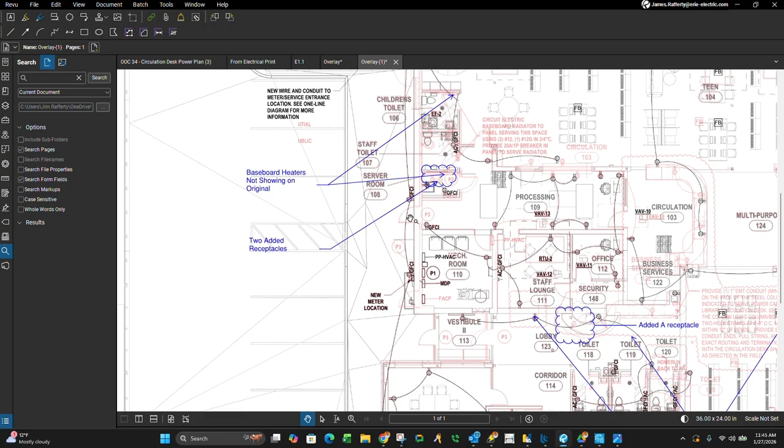After I've done my overlays, you can see right here, I've got everything marked up so that you can see the differences. So what I did right here is I've gone through and highlighted in blue everything that is the difference using the cloud tool, which adds a label too.

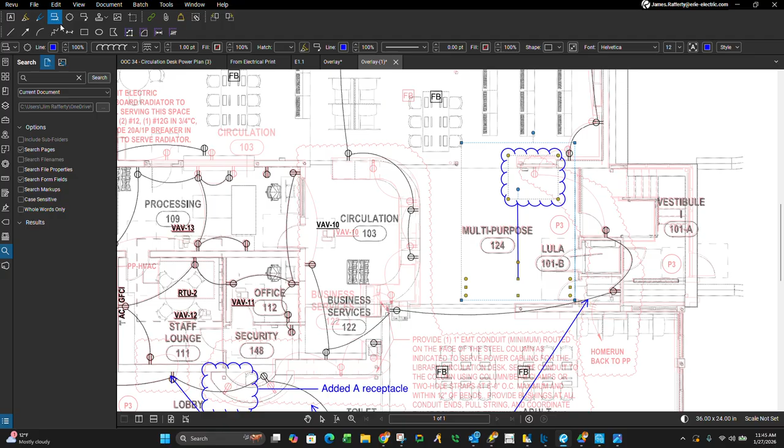What I usually do is change the color since we did red on the background. If you want to stick with this color for everything, you're going to right click on it and go to set as default. So now if I click this cloud again, it's going to stay in that blue color.

So right here we're going to make a note: added receptacle. Oh, we did not change this one, so let's do that again. Now we're going to set that as default.

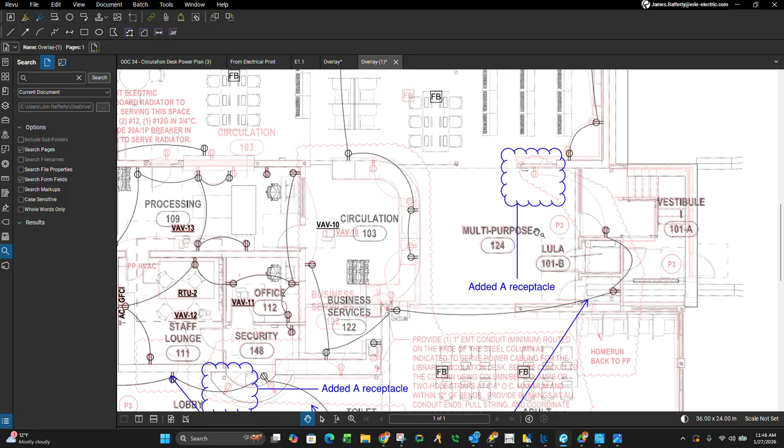So what I'm doing is basically clouding these. You can see right here all this is clouded, but all it was really doing was rerouting this feed that was coming from this side over here to create a new feed. So what I am going to do is carry a whole new circuit coming out here, because before it was just showing it going to there.

So you can see right here when we make one now, it's in blue and the wording is in blue. So they do upsize the conduit right here to 1 inch, so we could get them on that.

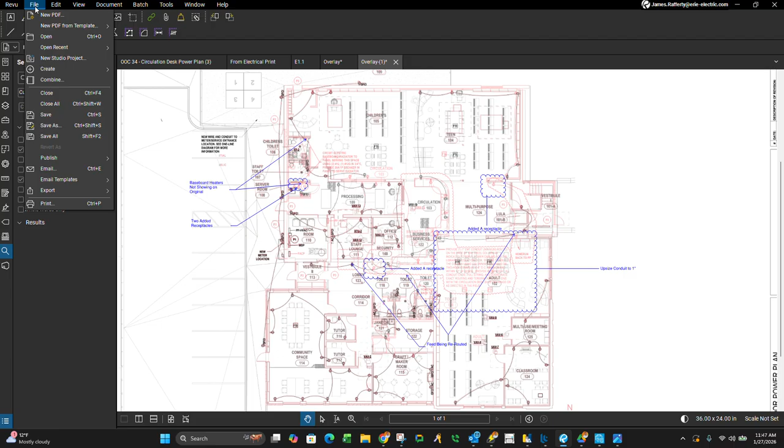Once I've done that, I'm going to save this one for now and get to that later. I'm going to make a full set because it's actually easier to give to the foreman this way too, so they can operate off the most updated prints and check. As opposed to flipping back and forth between everything, they can look through this fairly quickly and see where the changes were.

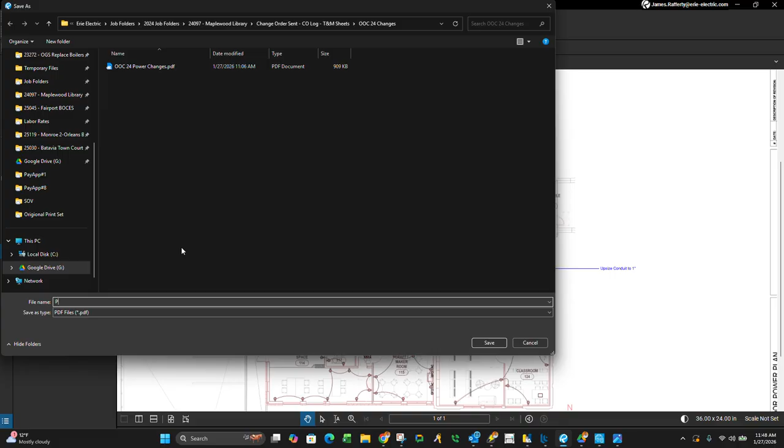So I'm going to save this as power OOC-24. And then what I'm going to do is look at the other one, which is lighting, and go ahead and do the same thing.

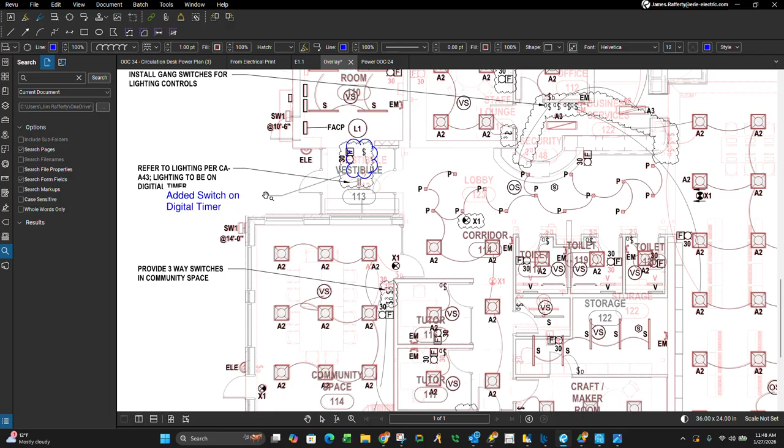We're going to look for changes, right? Right here, we've got an added switch. Added switch on digital timer. And then also the fire alarm device is there.

Right here we have this switch being moved. Original switch location being moved.

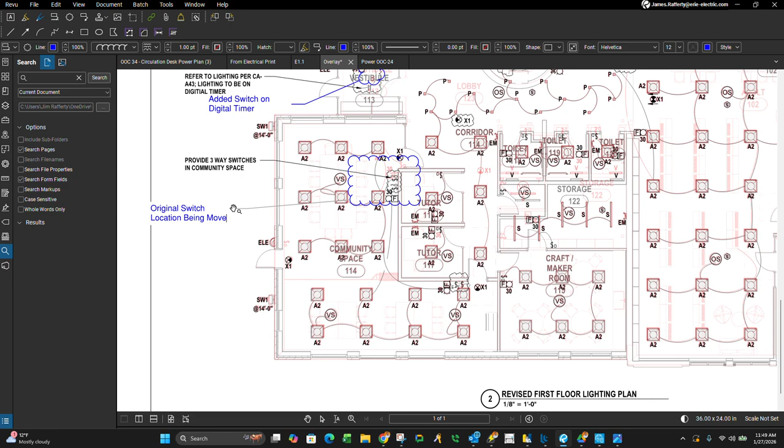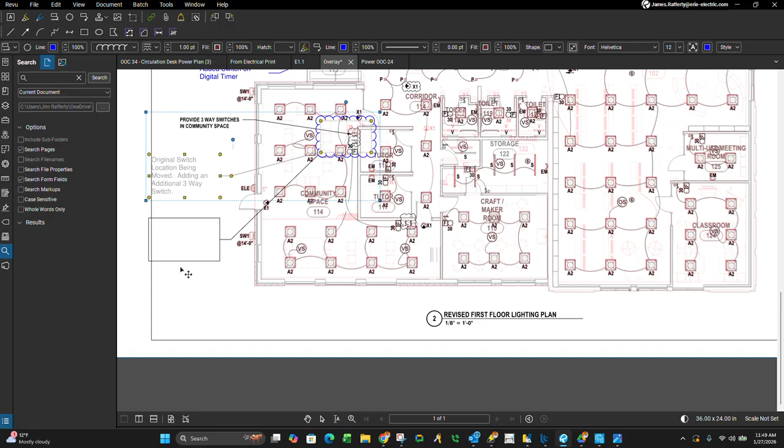Adding an additional 3-way switch. Same thing right here, we're going to go with this one: added an additional 3-way switch.

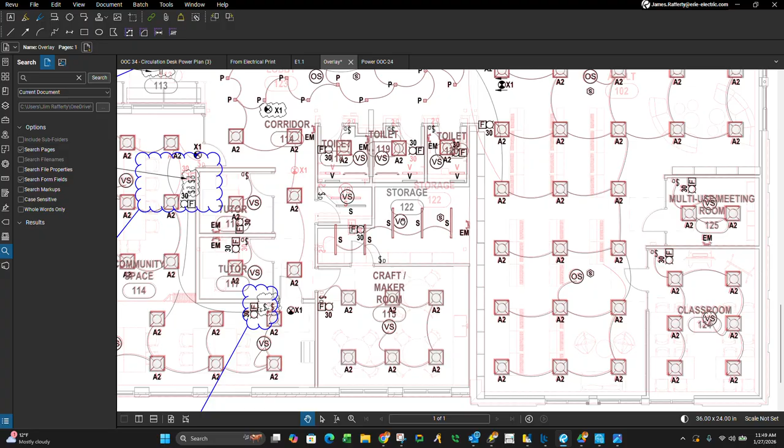We've looked around at the rest of the stuff. EM, that's all accurate. This is accurate, it's just off for some reason. These seem to be the same.

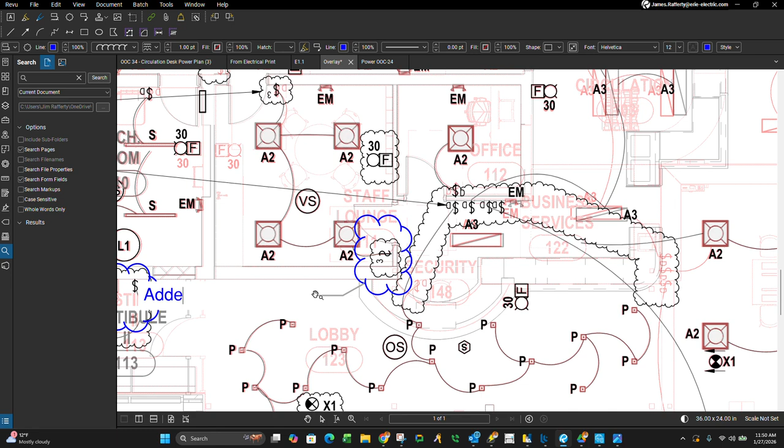So basically what we did is we moved this. This is an added 3-way switch right here, and this is converted to a 3-way switch. So: added 3-way. I can't spell, okay.

And then same thing over here, we are going to go with converted switch to a 3-way.

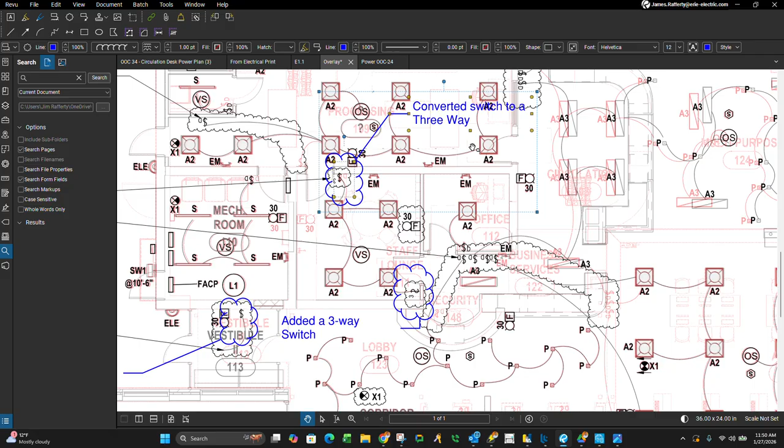So all of these switches had already been installed. So again, we're going to have to actually remove our existing and install new retrofit switch into wall. We are rerouting this switch.

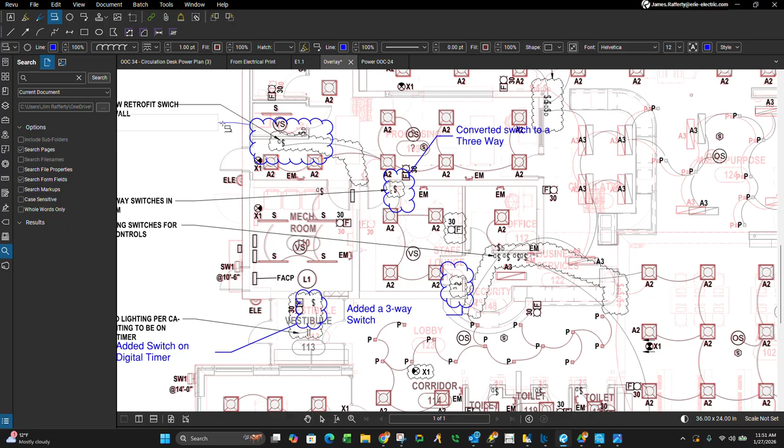Depending on where you are in the project, this may have already been done. So this switch has more than likely been cut in. You can check with the foreman. I'm going to price it up as if it has, because I think it has already. So when I do this on takeoff, I'm just going to do this as a new switch.

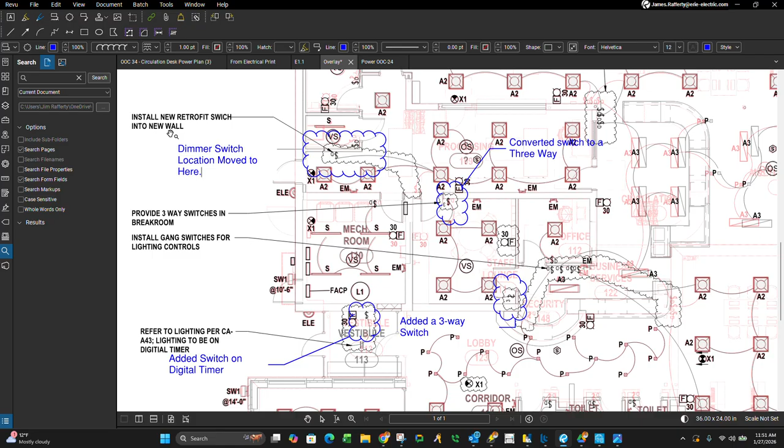Let's see here. Going through the rest of it, you can see these switches have been moved over to the other wall.

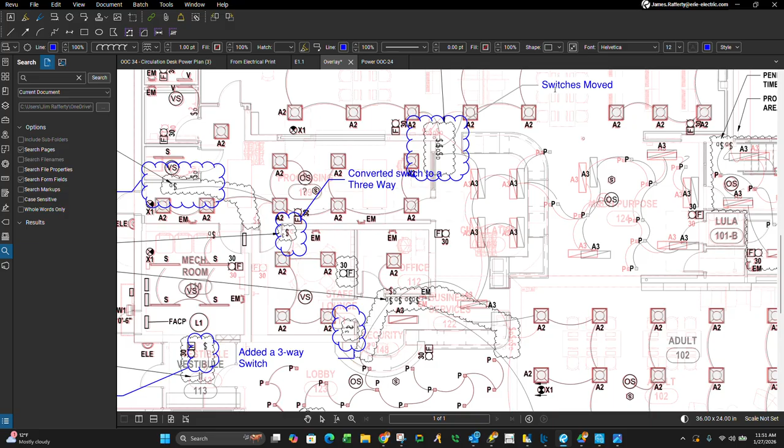And what else do we have here? So same thing down here where we've got these switches, added a fire alarm device. So it's a random one on here, but added a strobe.

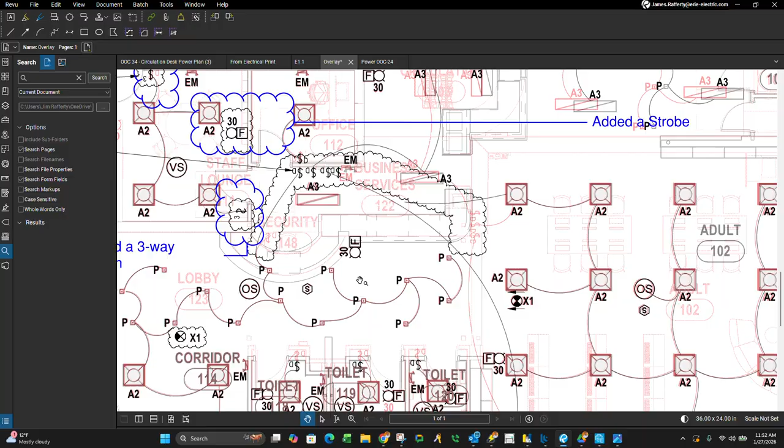Now this is all time consuming, right? So you can put your time on here for this as well. That's pretty much the same, so really it's just adding a switch and relocating.

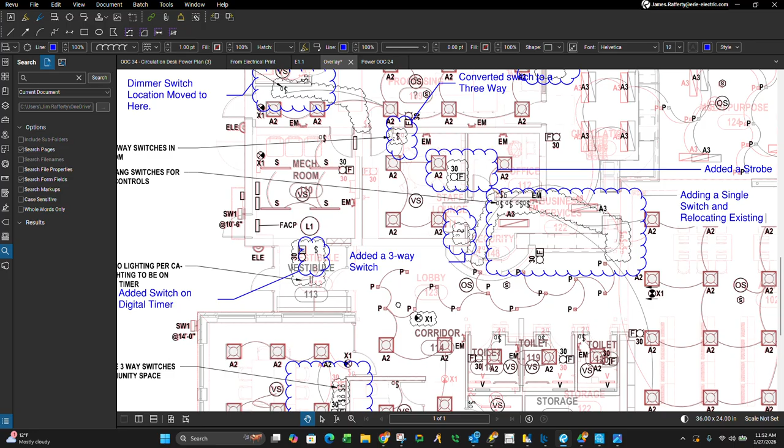Adding a single switch and relocating existing. Okay, all right, we got added an exit sign. Adding an exit sign.

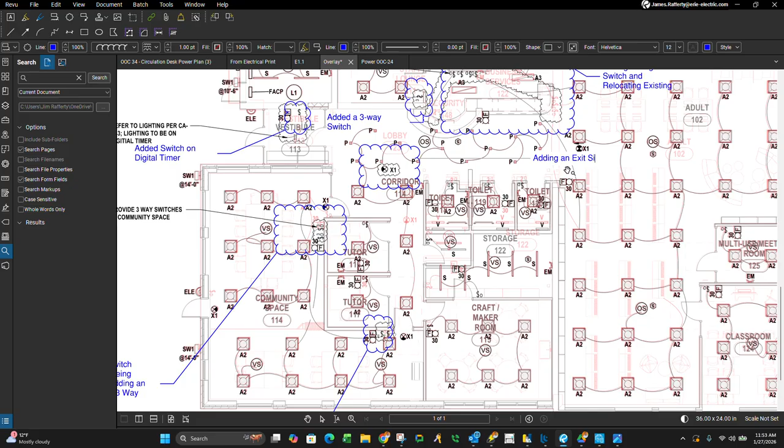So they had one here before.

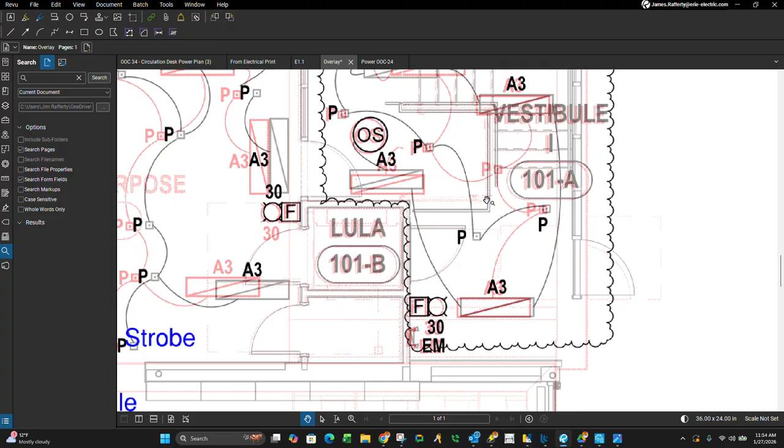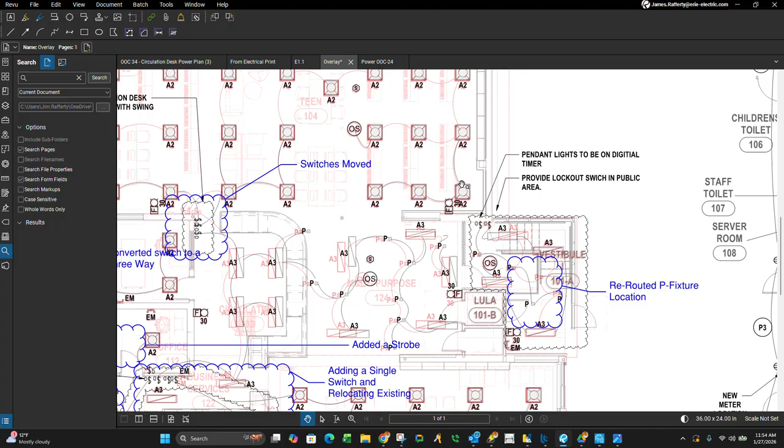So right here, I know this is a little bit off, but either way, they have rerouted this from here to here. Man, I really wish I had. I almost want to go back through this and fix this, but...

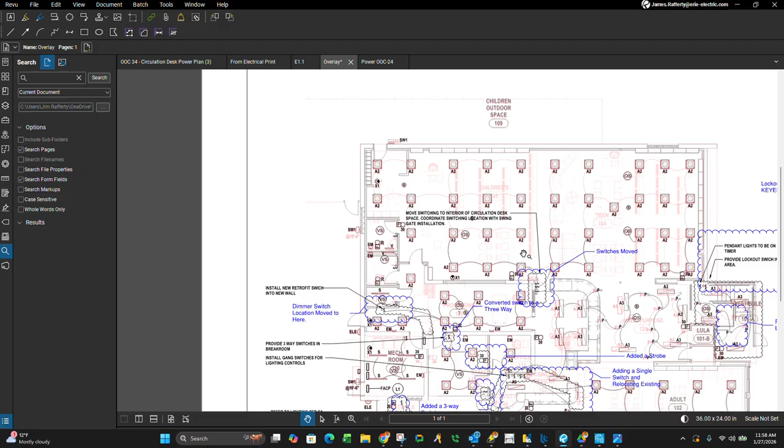Jeez, am I still recording? Got all sidetracked there. You might have to skip about a minute.

So that's really it. So once you do all this, you're going to upload it into Accubid. I'm going to basically flatten these two layers, combine this one with this one using file combine, add open files. I'm going to delete this.

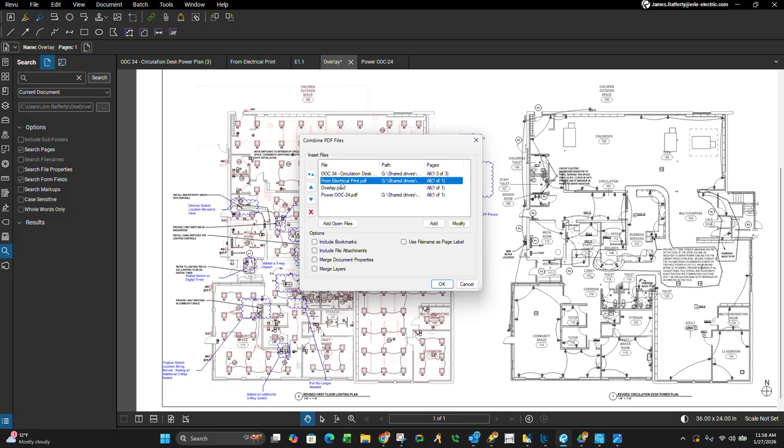I'm going to save this, and then this is going to be ODC-24, power and data, and this is where I'm going to upload into Accubid to do my takeoff. I'm probably going to print a set of this for the foreman too, so they can get a hard look at what everything is and where the changes are. All right, thank you very much.